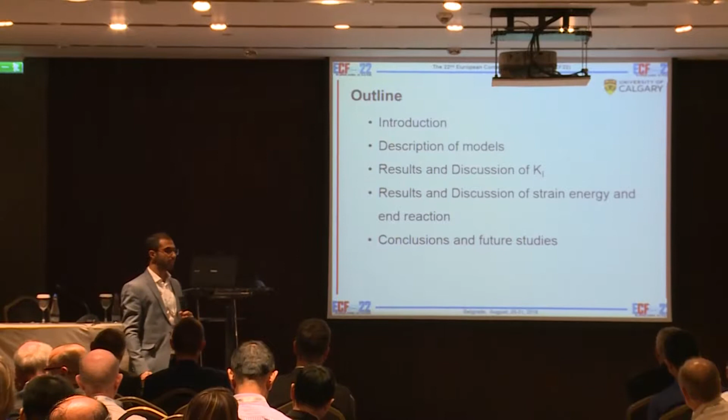So here's an outline of my presentation. For the introduction...

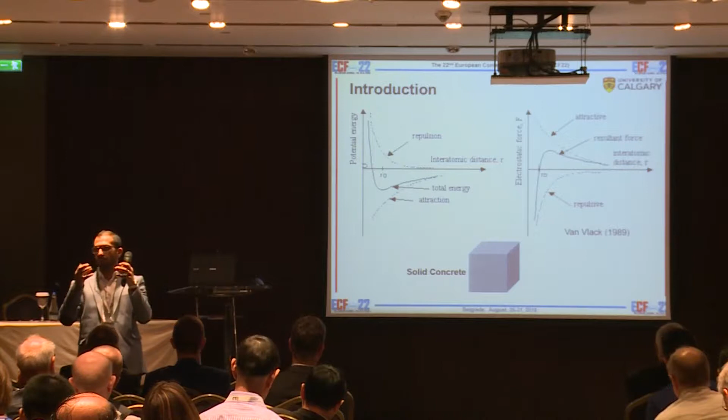If we look at this graph, it's the total energy for, let's say, two molecules or two atoms - the intermolecular, interatomic forces and the energy on the micro level. If you look at the left-hand side graph, it's the energy. This is the radius between two atoms or two molecules at the lowest energy, which is the normal phase for any material.

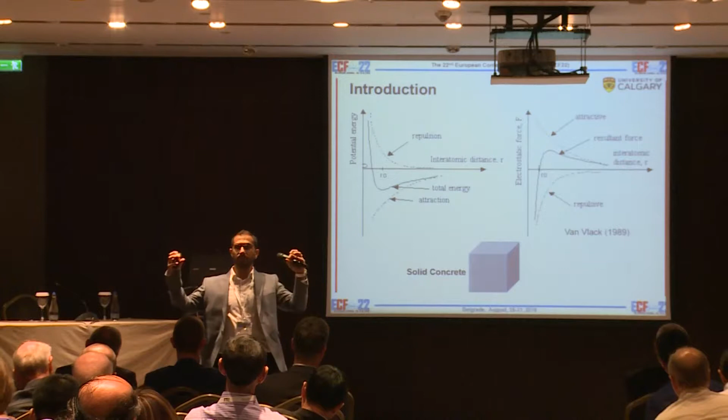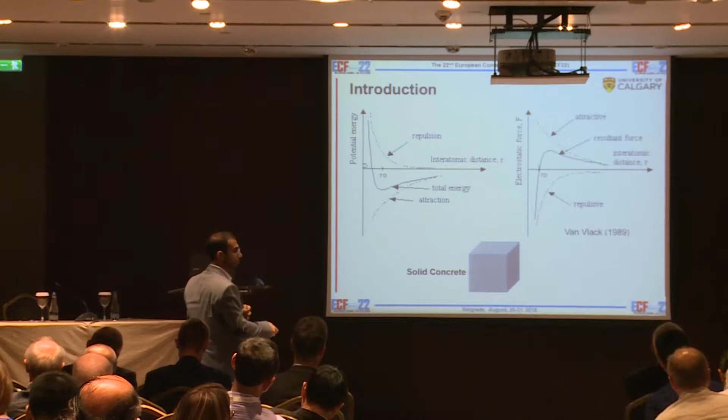If we try to pull or separate the two atoms far from each other, this energy is increasing a bit, or if you look at the force, it's decreasing. So if you are trying to pull them, you don't need too much force. But if you try to push them, to compress them, the force keeps going higher and higher until infinity. So if you have two atoms and you try to press them to touch, it's impossible. So for any interatomic bond, if you want to crack this bond by pressing it, it's impossible. You need to pull it to crack it.

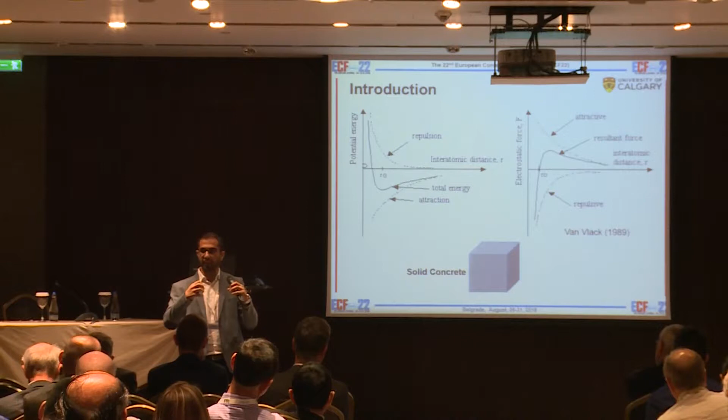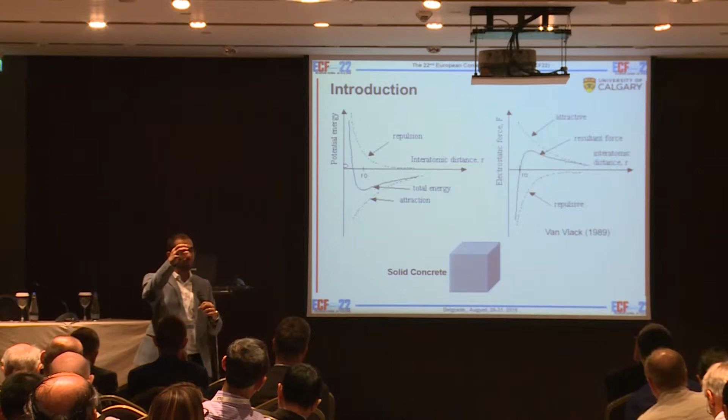To elaborate on this, let's look at this cube of solid concrete. If you have this solid concrete - no air voids, nothing in it, just pure concrete solid - and you put it deep in the ocean, very, very far deep, 2 kilometers, 6 kilometers, you have tremendous pressure, but there are no cracks happening because it's completely solid. You won't be able to crack it because pushing on any interatomic bond cannot break the bond. You have to pull it to break it.

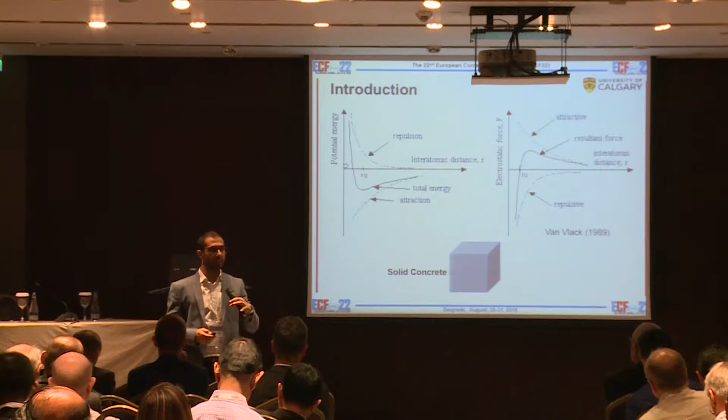So let's apply this to the compression stress field. If you are pressing on anything, it's impossible to crack it unless you have something that causes tension in this material. According to Griffith, the very basic principle we all know, when you look at glass samples with thick diameters, it has some strength, and then when he made the samples thinner and thinner, he got higher strength because of so many factors. One of the factors is eliminating all the flaws in the material, or most of them.

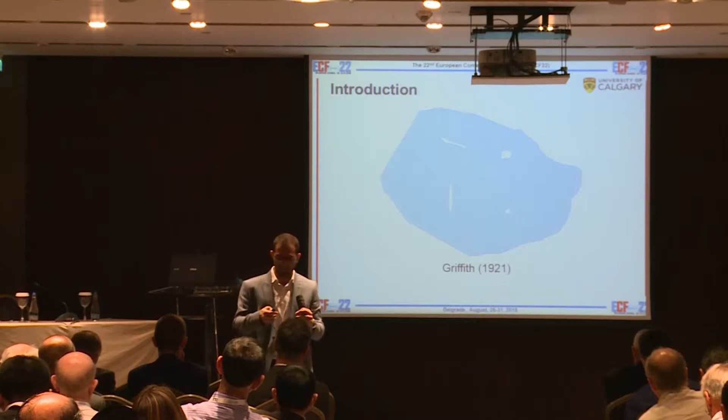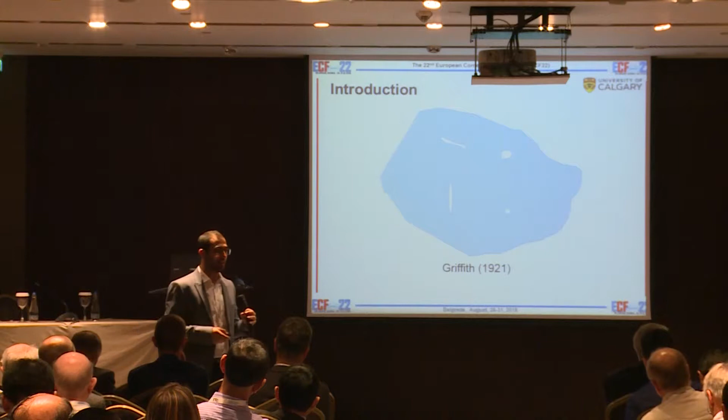So all materials have flaws, and it's widely believed that these flaws are the main cause of initiation of any cracks. We have different types of flaws, some regular, some irregular, depending on the material you're studying. It could be some discontinuity, it could be an air bubble, depending on the material. I'm studying concrete or similar materials, so one of the main flaws in concrete is circular flaws due to the presence of air bubbles. That's what I'm studying.

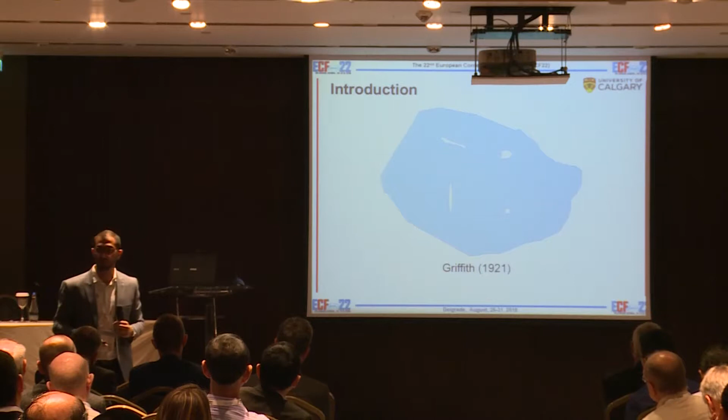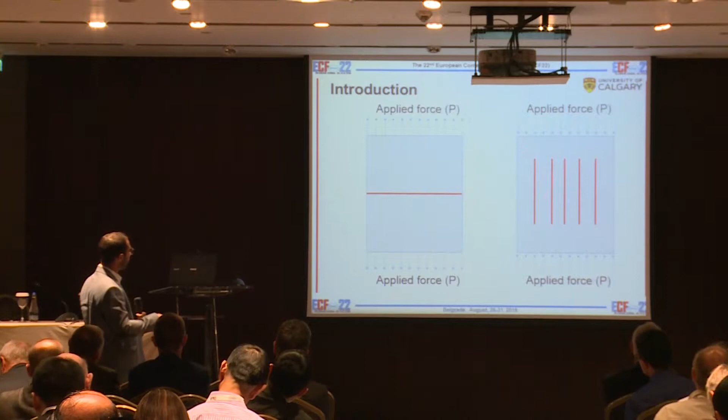Again, to compare compression to tension: if you are pulling a piece of brittle material, you'll get this kind of crack, and you can study all the parameters for this crack - linear, non-linear, plastic, extensive, advanced modeling - you can do this for a crack under tension. But if you have the same solid part of the same material and you're pressing on it, you're going to get some kind of cracks like this, parallel to the applied stress field. Unfortunately, you can't do so many studies on this.

I have a paper published in Theoretical and Applied Fracture Mechanics covering all the review of the previous studies for compression. Unfortunately, there is no theorem that you can apply directly to the compression stress field. So many people modeled stuff, but all the numerical modeling done for this type of problem is one-case modeling - they are modeling what they got in the experiment, either by imaging or CT scans. They are modeling what they get and trying to justify it, but not having a theorem to be applied generally, which we have in tension extensively.

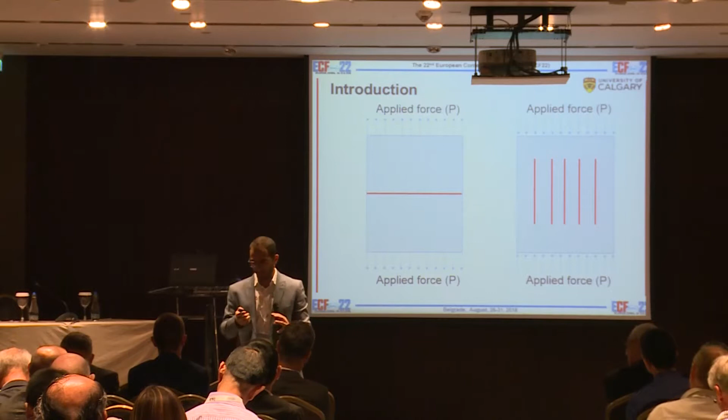So let's look at this equation for K1. This is the basic equation: K1 equals some factor times sigma root pi A. In tension, if you have an infinitely thin crack and you're applying tension, as long as the crack is growing, K keeps growing until it reaches K1C and it fails. There is no other possibility but having K grow with crack length, because this is the governing equation.

But if we have an infinitely thin, hairline crack in a compression stress field, it doesn't do anything. Why? Because it doesn't change the strain energy within the specimen or the model, so nothing has changed. This infinitely thin crack doesn't affect anything.

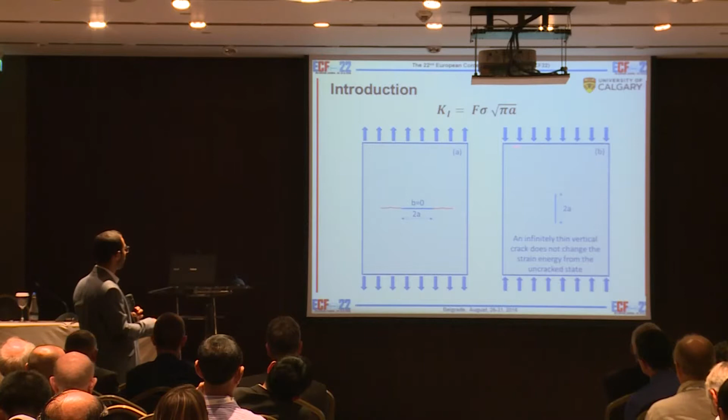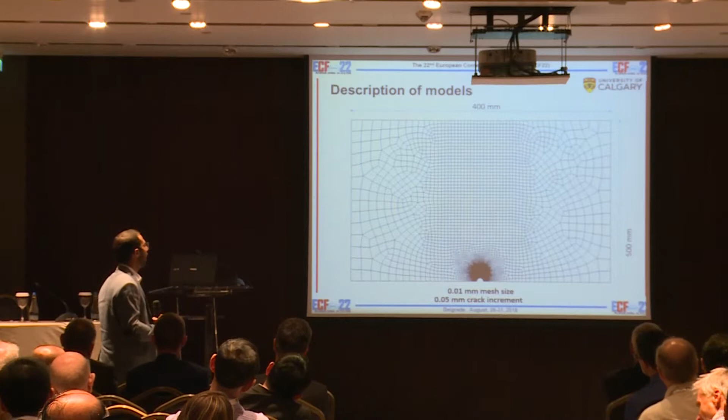But keep in mind that in tension, K1 keeps growing infinitely as A grows. So what we did is model this with an air bubble, exaggerated in size, a 20 millimeter hole or other values in this 2D model. The mesh size around the model is 0.01 millimeter, and we modeled the crack in increments of 0.05. This model was built on FRANC2D, a basic old 2D modeling software.

The interesting thing about FRANC2D is it's very simple and it has all the crack propagation remeshing built in, so I don't need to use so many other developed software. I just used this software to study this problem.

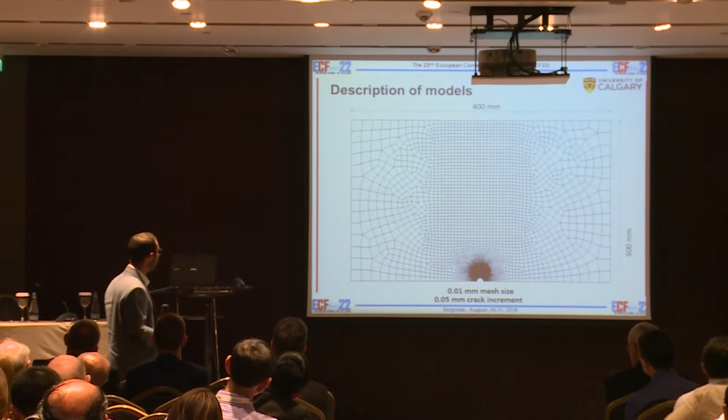So this is how it looks like, the mesh around the discontinuity. We did 5 models on FRANC2D: 3 of them had circular voids, 10 millimeter, 20 millimeter, and 5 millimeter, to study the effect of size for a circular void.

And then we have 2 elliptical voids: one is 10 width by 20 height, and one is 10 width by 5 height, to see the effect of flattening the circle into a vertical ellipse or a flattened one. You can compare the effect of height using the two ellipses and the 10 millimeter hole, and compare the effect of width using the 5 millimeter and 10 millimeter width, which have the same height but different width.

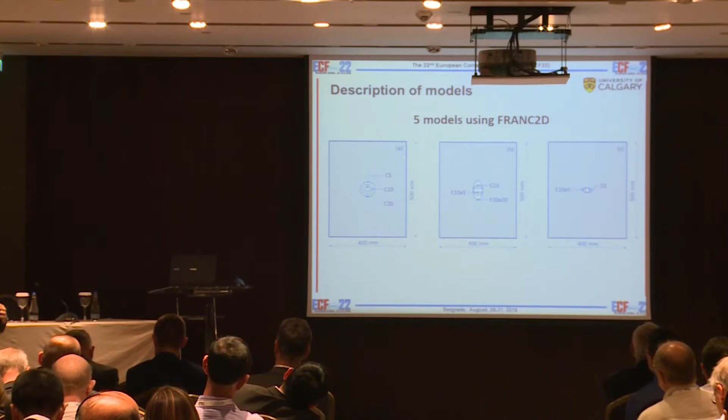We modeled the C10 and C20, the 10 millimeter and 20 millimeter, on Abaqus to get the estimation of the total strain energy within the model and the interaction. It's easier in Abaqus because strain energy calculation is not very user friendly, it's too old for anyone who used it.

So this is what we got in terms of K1. I'm using K1 because these types of discontinuities result in tension at the higher end and lower end of the discontinuities, so we have tension here and here, equivalent to the end stress according to the geometry of the shape. Then we have compression on the side: 3 times in the case of a circular shape, 5 times for the flat ellipse, and 2 times for the vertical ellipse. For those who studied these geometries, you all know these values.

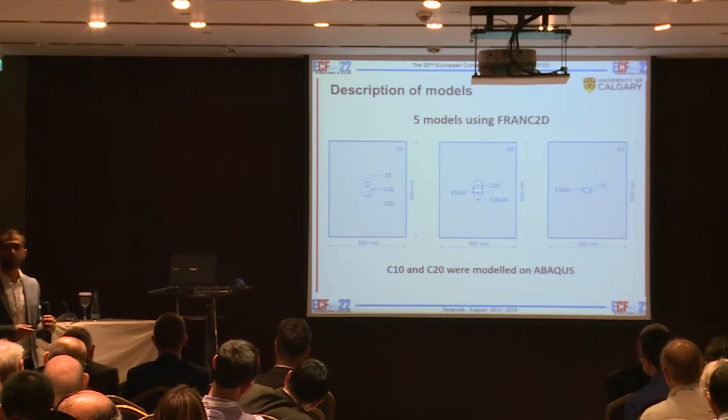So we got K1 against crack length for C5, C10, and C20, the circular voids. Then this is the vertical ellipse, 10 width by 20 height, and this is the flat ellipse, 10 width by 5 millimeter height. If you look at this plot, the interesting thing about all the plots for a discontinuity in a compression stress field is that the K value keeps going higher and higher until a certain crack length, and then it gets lower, which completely opposes what we know in tension, where as the crack grows bigger, K keeps going up and up.

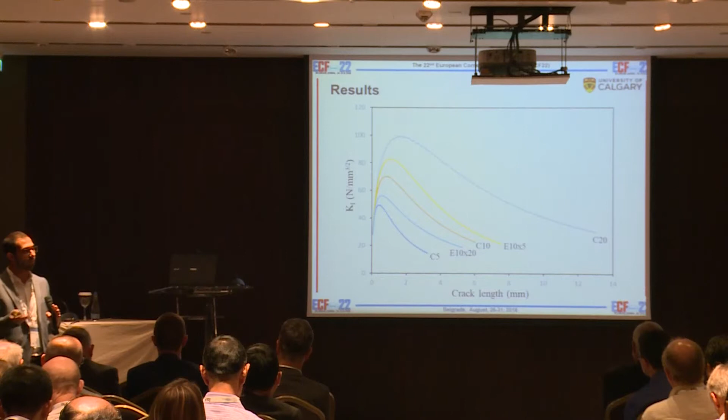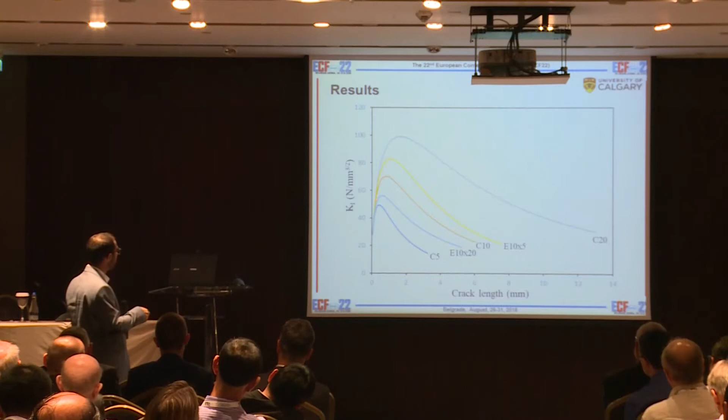But in compression, as the crack grows bigger, K keeps going up until a certain point, and then it goes down. This is at a certain load, all for an applied 1.3 millimeter displacement. But if you increase the load, you get a different plot, shifted and bigger.

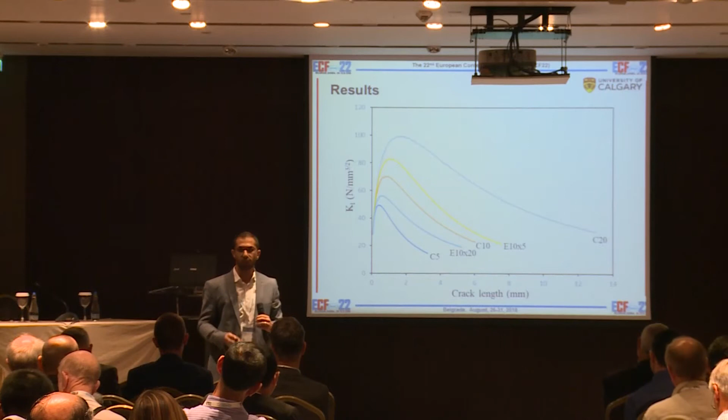So if we look at these plots, what we understand is: you press on something, you get a certain crack length, and it can't grow bigger because K just gets low. If you want this crack to propagate more, you have to apply more load. There's no unstable crack propagation in compression. Opposing tension, you have unstable crack propagation. In here, there's no unstable crack propagation.

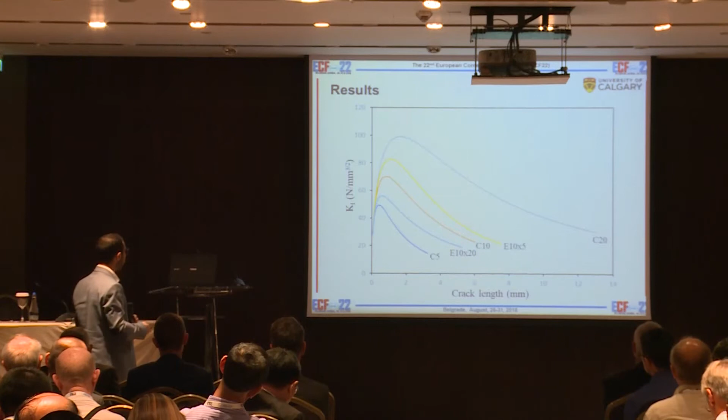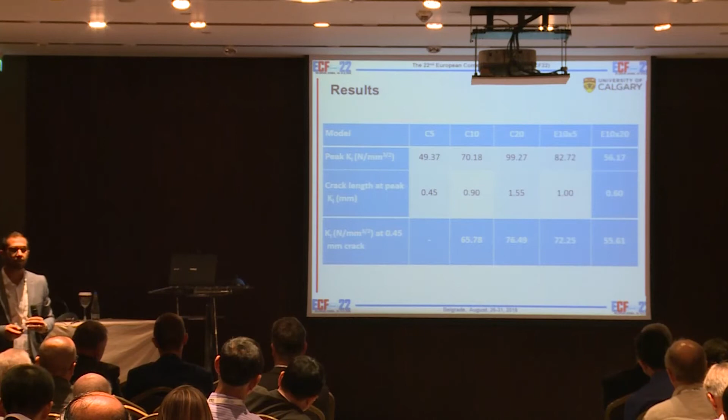These are the values for the plots I showed you, the peak K1 values depending on the shape. When you have bigger sizes of circles, the peak K1 is higher. If you look at the ellipse, the flatter ellipse has way higher K1 compared to the vertical ellipse, which is opposing anything you'd think eventually. So when you look at the shape of the voids I used, you'd think the vertical ellipse is more critical, but numerically the horizontal ellipse was more critical.

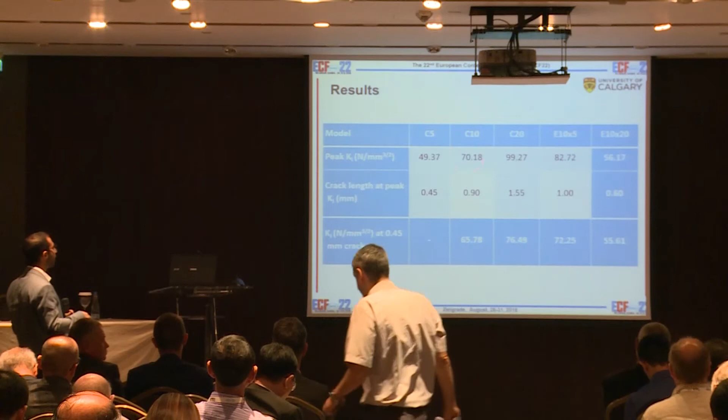And the crack length which has the peak K1 grows bigger for the growing circular voids. For the flat ellipse, you have a 1 millimeter crack length at the peak K1, and for the vertical ellipse, it's smaller.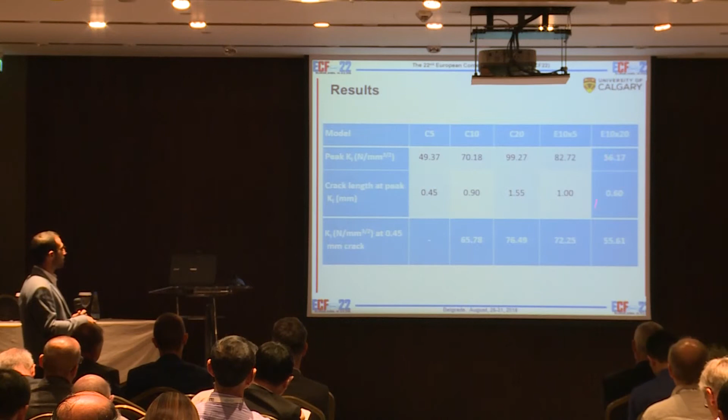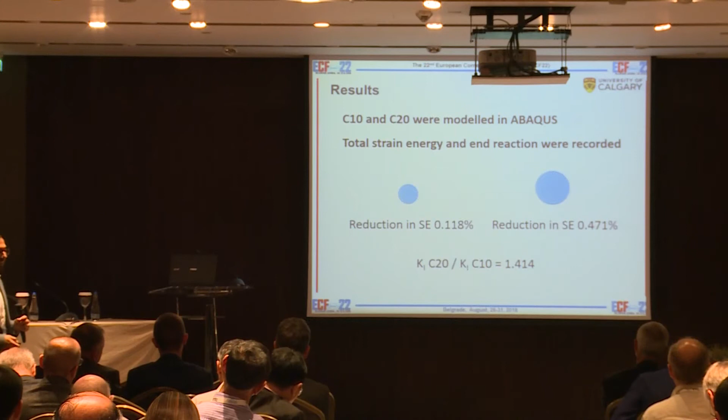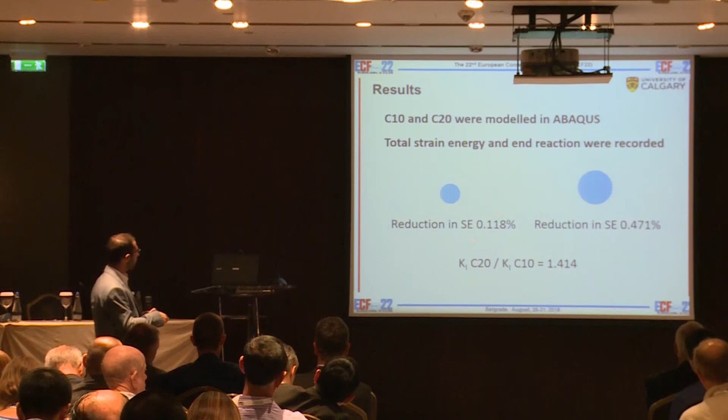We modeled C10 and C20, the 10 millimeter and 20 millimeter holes, in Abaqus to get the estimate of the total strain energy within the specimens. So the total strain energy with no cracks, just the presence of the voids, we have the reduction in strain energy for a model without any voids versus a model with the void we're using. This void reduced the total strain energy in the model by 0.12%, and the 20 millimeter hole reduced the strain energy by 0.471%.

If you look at these numbers, if you divide this by this, it's 4, which is the ratio of volume to volume. So the reduction in strain energy is directly proportional to the volume of the circular void.

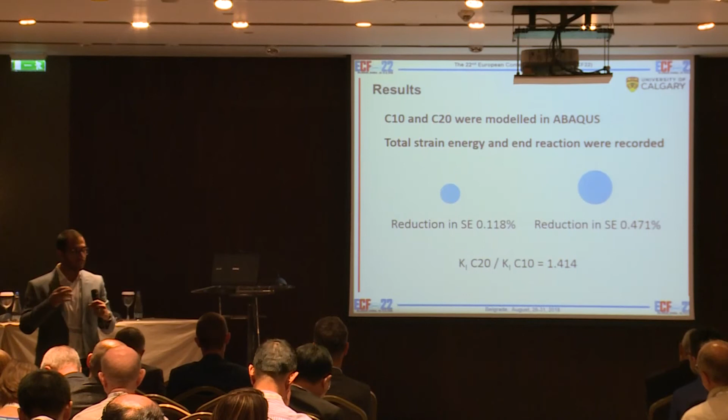And if we look back at K1 for C20 and K1 for C10 and divide them together, the factor is 1.414, which is the square root of 2. So doubling the size of the circular void resulted in a square root of 2 factor of the K1.

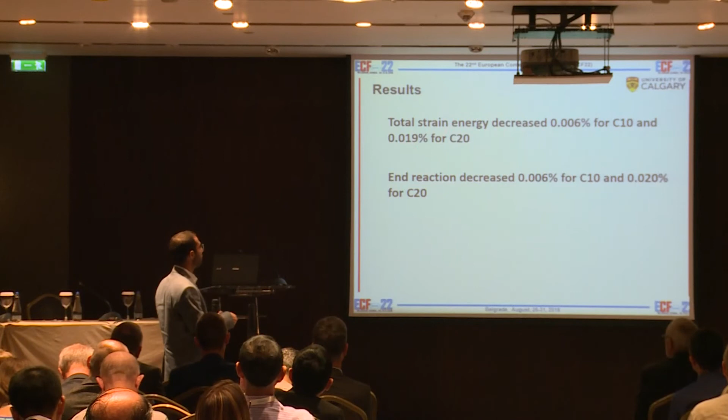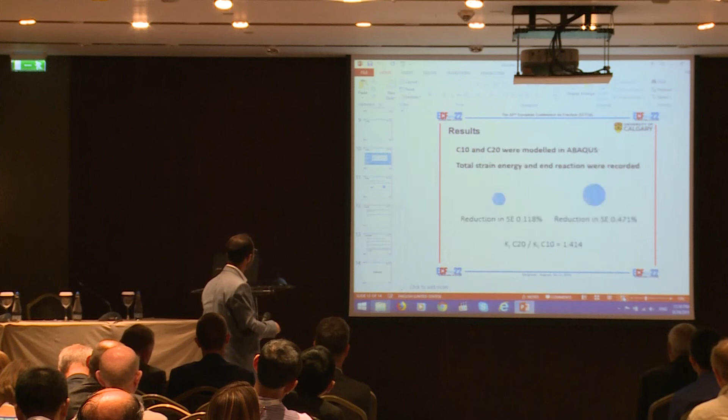The total strain energy decreased by 0.006% for C10 and 0.02% for C20, for a 6 millimeter crack. So if you have a 6 millimeter crack in a model that big, 400 millimeter by 500 millimeter, the reduction of strain energy is only 0.006%. This can emphasize and elaborate what you have if you're doing a concrete cylinder test.

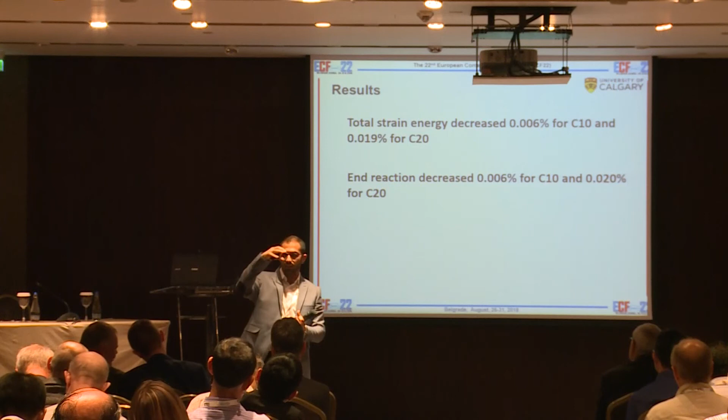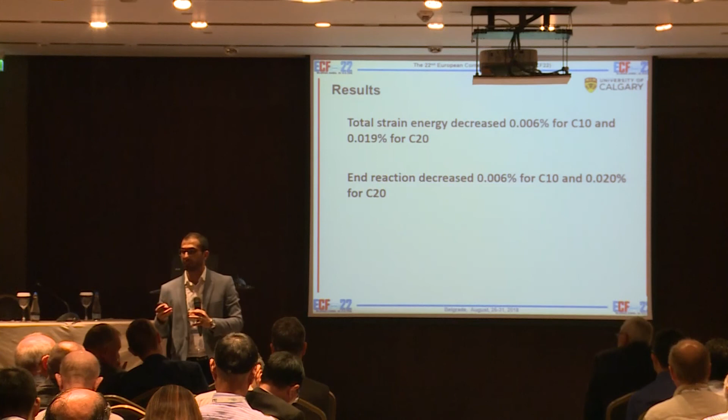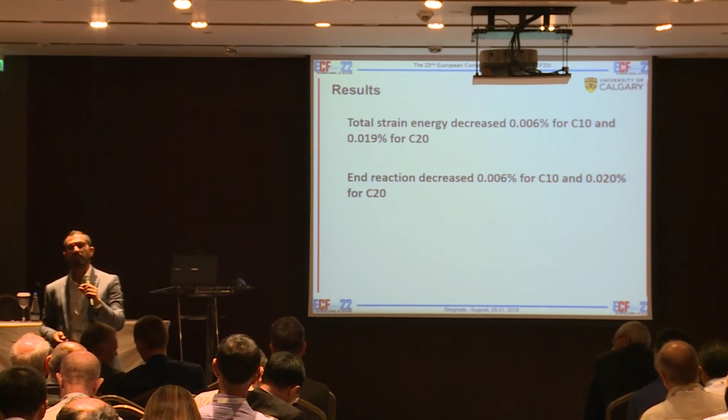If you have a concrete cylinder test, you have so many hairline cracks, and the load is constant, then it drops. So you can have as many hairline cracks as you want, and they don't affect the energy that much, they don't reduce the reaction that much. The reaction only decreased by the same value, 0.006%, in case of having a 10 millimeter hole. So it's not changing much.

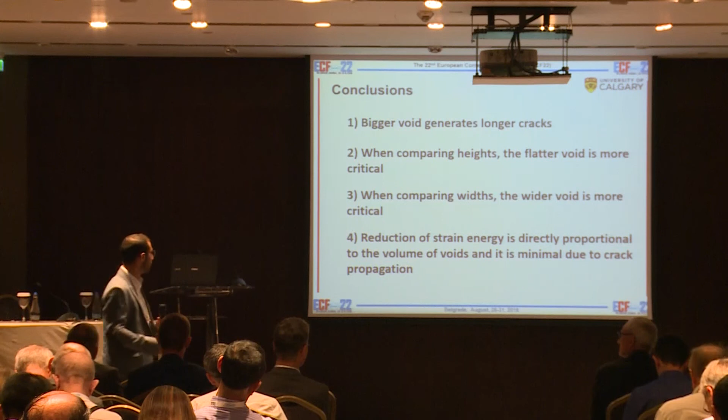So to conclude: bigger voids generate longer cracks. When comparing heights, the flatter void is more critical. When comparing width, the wider void is definitely more critical. The reduction of strain energy is directly proportional to the volume of the void, and it's very, very small, so you can't compare them and get values that can be used in extensive studies. That's all I have for you. Thank you for your attention.